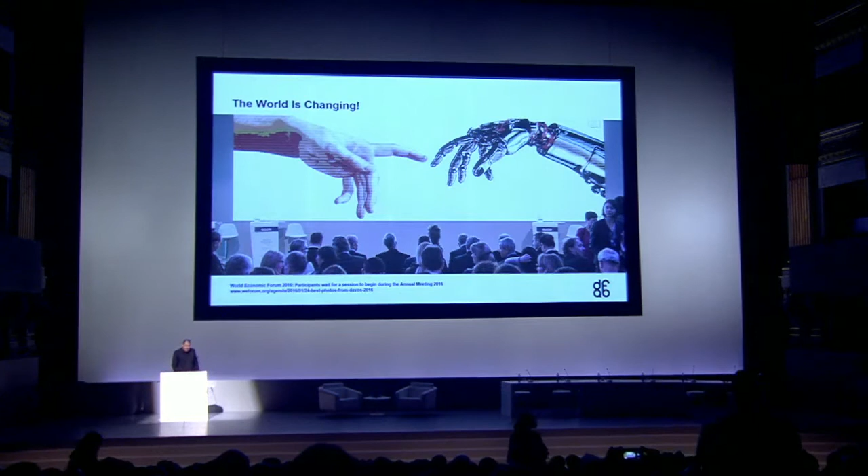I believe so. As you know, the world is changing. We are challenged with rapid societal changes induced by fast technological changes. We heard the discussion just before. Now, what is maybe a bit under the radar is also the fact that production is changing, the way we make things, the way we do things.

We heard a lot about the fourth industrial revolution, about many of those changes - 3D printing, additive manufacturing, robotics - but somehow it's always happening a bit on the side. So the question I would like to put on the table today is, will the way that we actually build also change? And the answer I would like to give is yes.

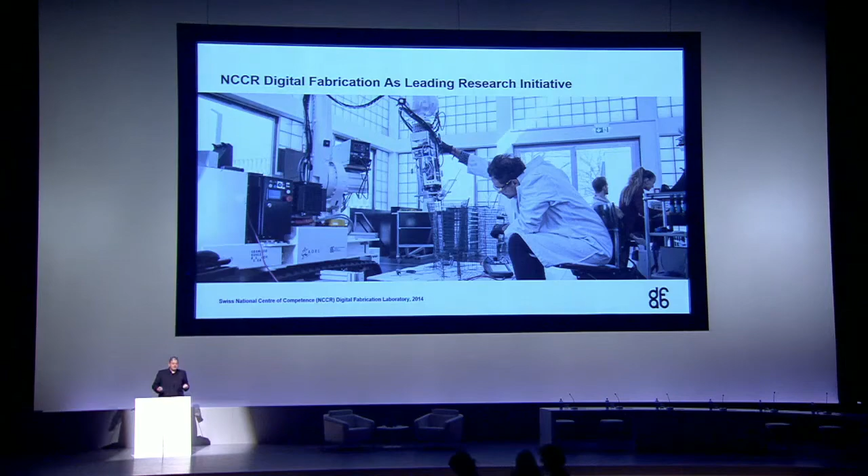In Switzerland, I have the pleasure to direct the NCCR, National Center of Competence in Research on Digital Fabrication. It's an initiative that brings together different experts from various disciplines in an interdisciplinary research setting. We have material scientists, roboticists, structural engineers, environmental people - different people working together with architects to see how we can promote and proactively cultivate a new digital building culture.

But what I'd like to do with you here is bring you back a bit in time, see where it all started, where the motivation for this development came from, so you can share this with me. We started our research at ETH Zurich in 2005, and this was the first setup which we built.

A simple robotic arm, like you find them in thousands in, for example, the car manufacturing industry. But what was special is that the robot was set up in an architecture faculty, which hadn't been done up to that moment. Why did we bring a robot to an architecture faculty in the first place?

If you want to build buildings and bring that together with the digital, you need a way to access the materiality of architecture, its materialization. How do you do that? There is no machine that builds architecture - it simply doesn't exist. There are machine-specific tools that build specialized parts, but no machine that actually assembles architecture. And if you look at architecture all around you, it's basically about assembling parts to form spaces which we all love to inhabit and take part in our social lives.

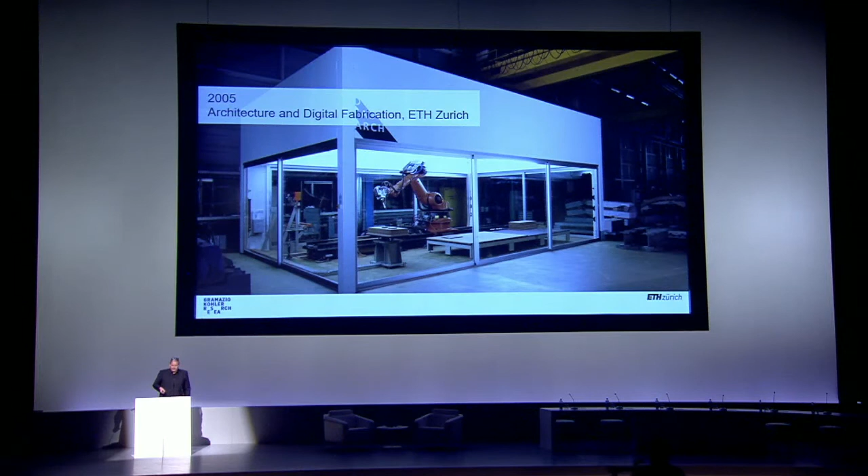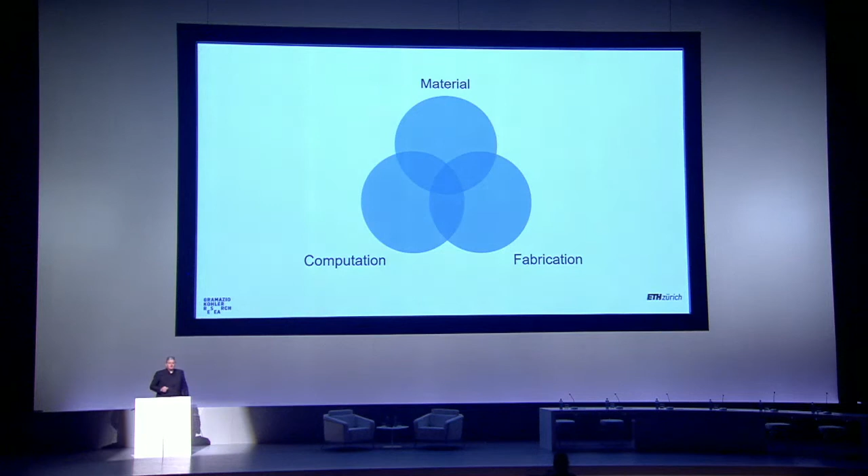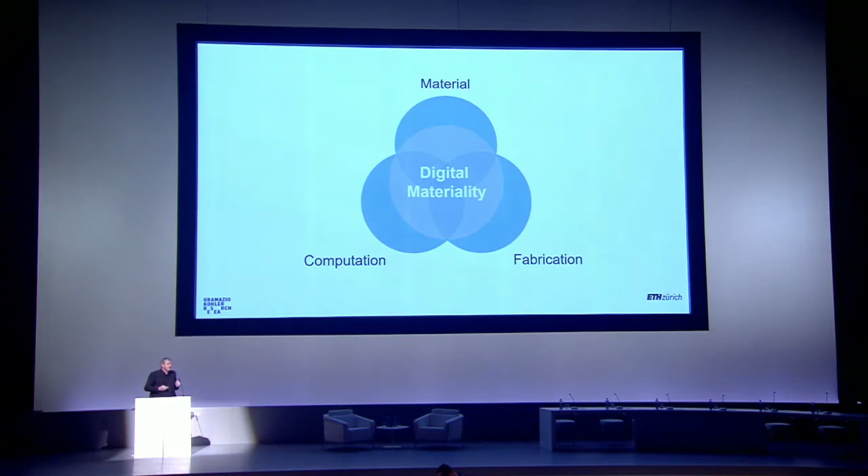From this initial setup, we formulated a hypothesis: we wanted to bring together computation, material, and fabrication. By bringing those together, our hypothesis is that materiality as we now know it - wood is wood, concrete is concrete, and you treat it in certain ways - actually shifts to what we call digital materiality, a materiality that becomes informed. In this case, this concrete wall is not an ordinary concrete wall. It's made out of concrete, yes, but it is as much digitally informed as it is physically concrete.

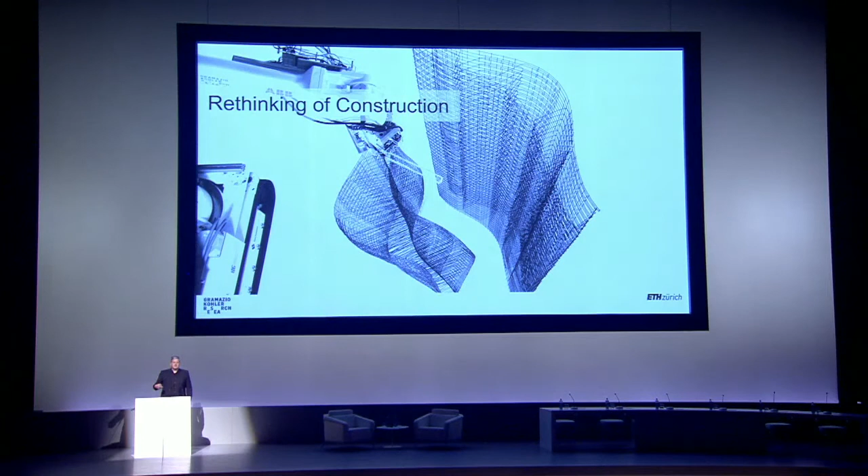Then it leads us to a rethinking on how we construct. If we start to build with these digital tools, we do not construct the same way. So education actually needs to change, and we need to think about new material and constructive systems.

This also leads us to the design of processes. As architects, we are trained to largely think in plans, sections, possibly 3D models, which are relatively static, and then through iterations come to a final design.

Now, with digital tools, we have the possibility to encode behavior as part of a design. And we can thus shift certain decisions, basically creating an openness to an adaptive design in such a way of conceiving architecture. I'll illustrate this later.

Last but not least, and that's a high motivation for me and my fellow team, the digital is also prone to lead to more abstraction in life. We always look just at screens, etc. But what is nice with this digital materiality is that the sensuality of material is enhanced. So whatever we do physically is actually exposed more through the digital control of these processes.

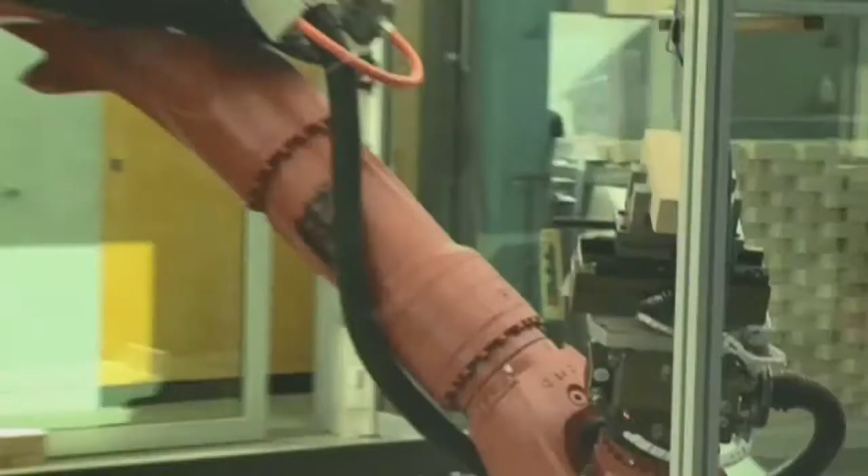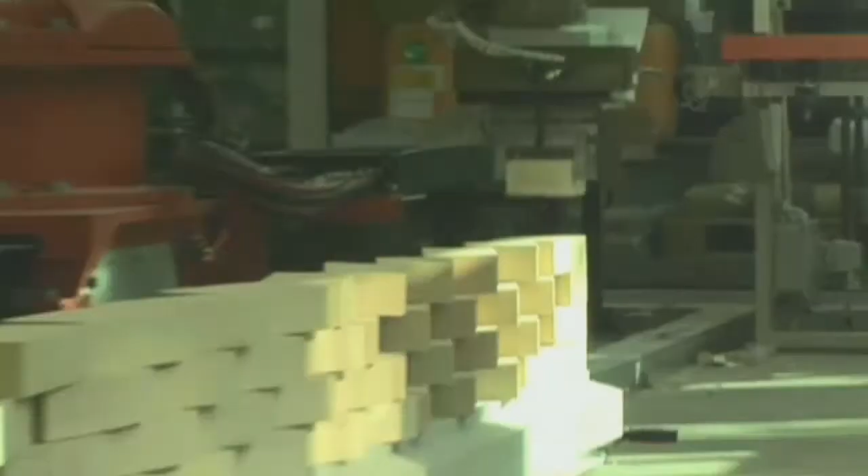You see the robot grips individual stones, puts glue precisely where this needs to be put on the stones, and positions them. What you can recognize here and in the next picture is that each of these stones is just slightly rotated, up to 17 degrees in one direction or 17 degrees in the other direction.

And what you saw before as this narrative of these oversized abstracted grapes is actually just the reflection of these slightly rotated stones in the daylight. So this facade constantly changes its appearance over the day. It has a plasticity, but if you go closer, the material which it is made out of, namely brick, is still very present. So the material doesn't lose its presence in this.

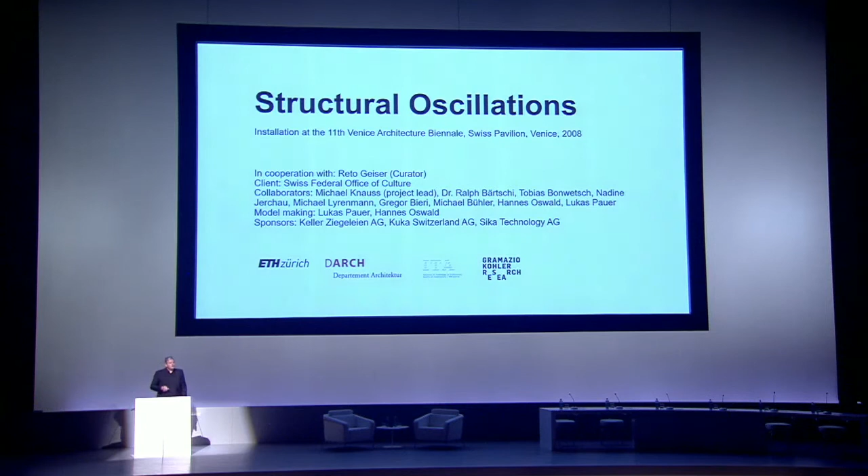Now, you could also take robots on site and start to do prefabrication on site. We tested this at the Venice Biennale in 2008. Here you see a robot called Rob in a container shipped to the Biennale, and we do the production directly in front of the Swiss Pavilion, where we designed an exhibition for.

So these walls here, you see they have certain features. They then form a new spatial arrangement in the pavilion to host an exhibition. Now, what is special here, and now I come to the design of processes, is that this wall here is transformed into this layout by a programmed design.

So this line here, we call it the line of negotiation. It's actually a drawn line. This line was drawn because there are multiple participants in the exhibition, so we needed to shift the position of this wall up to the moment before the exhibition was actually realized.

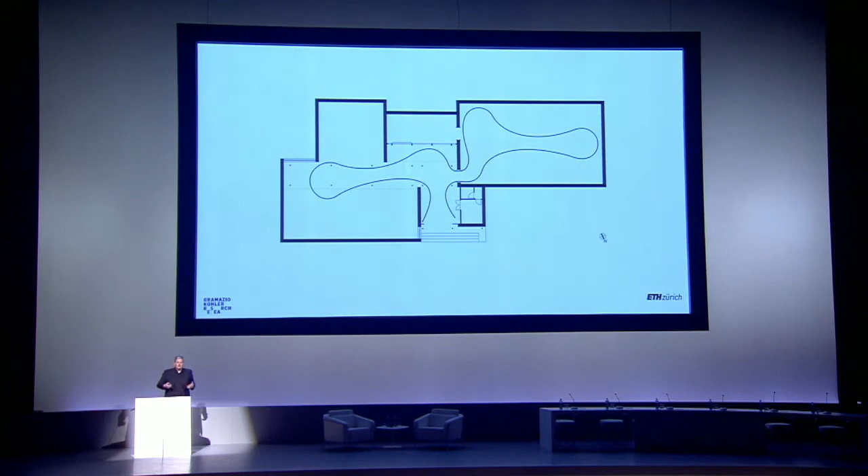Now, depending on whether this wall was rather straight or whether it was curved, the wall started to oscillate on its own, meaning by a program. So wherever here the wall, I try to show it here, is rather straight, it starts to oscillate, and where it's curved, here for example at the ends, it doesn't oscillate.

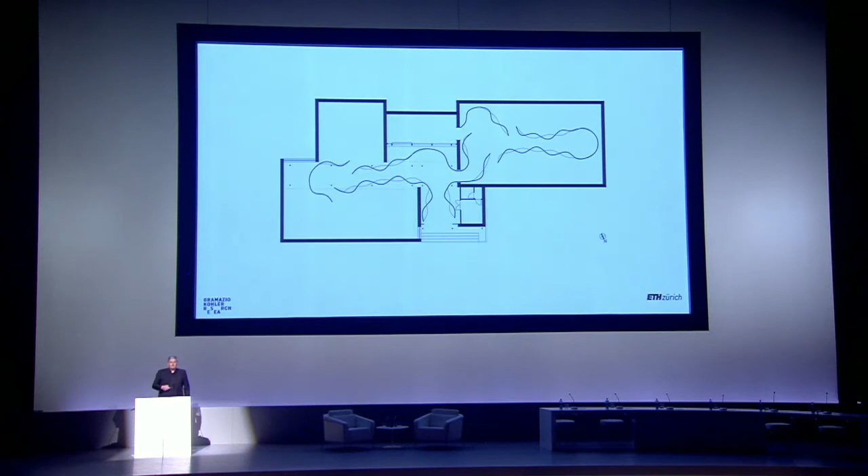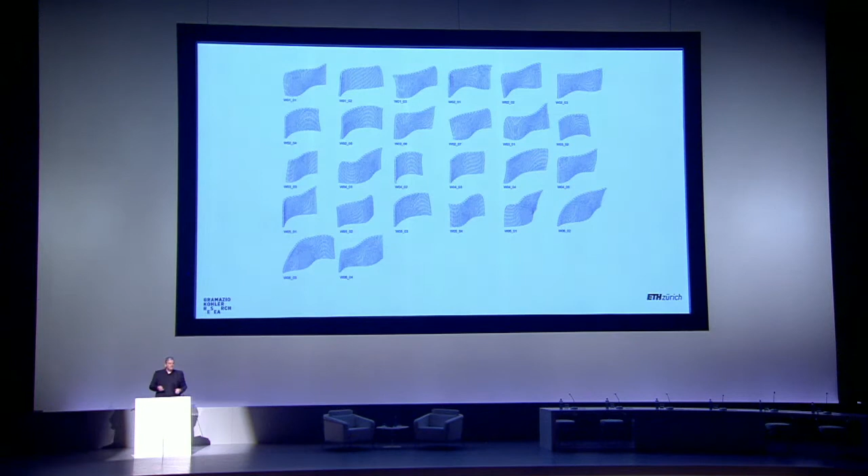Now why did we do that? This wall was produced by about 4.5 to 5 meter long segments, and by simply curving and oscillating this wall, we actually gave a constructive meaning to this wall, meaning that each of these elements could stand on its own without further reinforcement, without anchoring. So a very simple way of creating a stable wall, at the same time taking this liberty into the design of this installation.

And here you see how it looked like, how it gained a kind of, let's say, natural, almost textile appearance, and how it stood there quite gracefully without further support or anything, because we took in the constraints and processed them as part of the design. So we could change this wall layout up to the moment of its production.

So we can take robots and prefabricate on the building site, but maybe we can also take robots, and we will see that in the future, directly onto the building site. This is a program, a research which is actually still in progress. It's called Mesh Mould, and you see on the right hand what it produces.

It produces steel wire meshes, which are actually reinforcements for concrete walls. Now, what is special is that by a robot building this wall, you don't need any formwork to build a concrete wall, and you have design degrees of freedom. You can freely shape this wall, and you can also thin the wall out where you need it.

Therefore, you can save a lot of materials, a lot of labor also, in the process of making concrete walls. Now, if you know that concrete is responsible for most of the CO2 pollution in construction, this becomes quite an important argument. Maybe the way that we build with concrete will change through such processes.

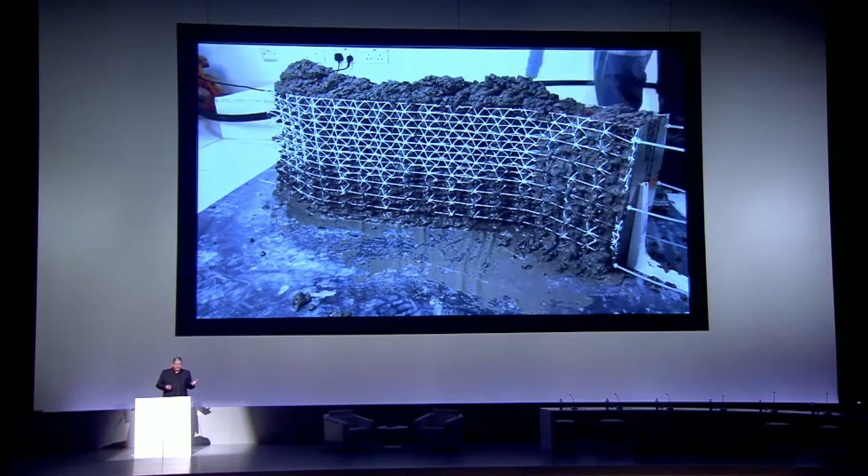Some of the material flows out, but most of the material actually stays. If you attune the properties of the concrete mixture rightly to the size of the spacing of the mesh, you directly build a concrete wall. This wall can then be finished manually, so this is a collaborative process.

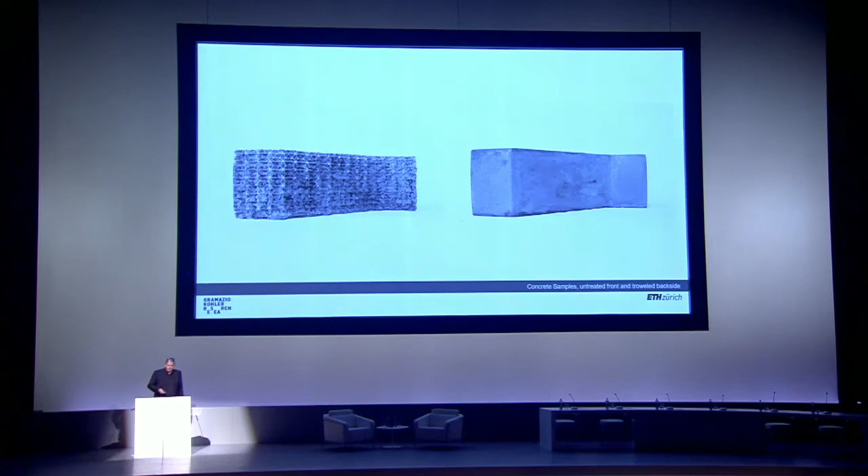At the current stage, we're now testing the system at a full building scale. This is a building that's actually the only work I showed which we did in the architecture office. That's a building which we designed in the office, onto which you can plug multiple other buildings to test new building materials, new energy efficient systems, etc.

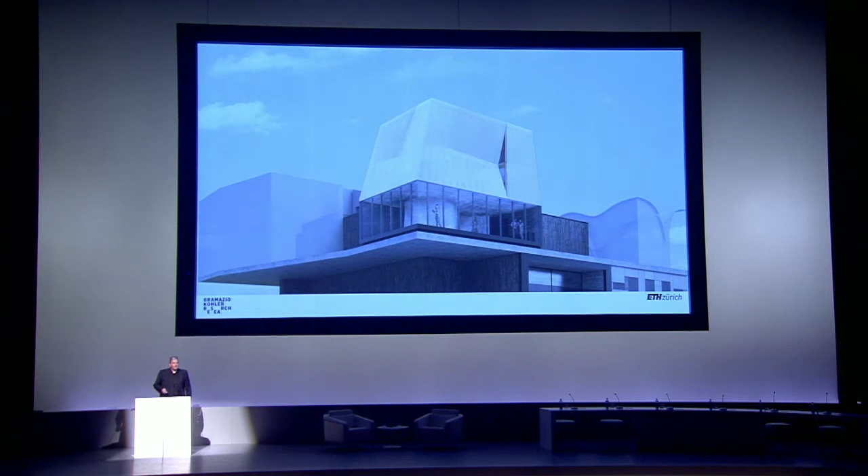On this building, we'll now build this small building, and you see in this first floor here that there will be a wall built with the system. This is roughly how the wall will look like. It's optimized for structural performance, and it supports the entire upper 2 stories. So this is the proof that these systems can actually work on a load-bearing scale.

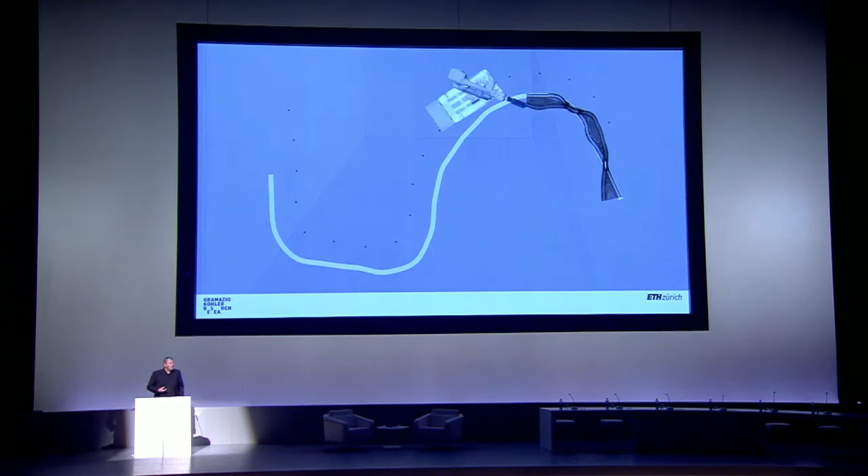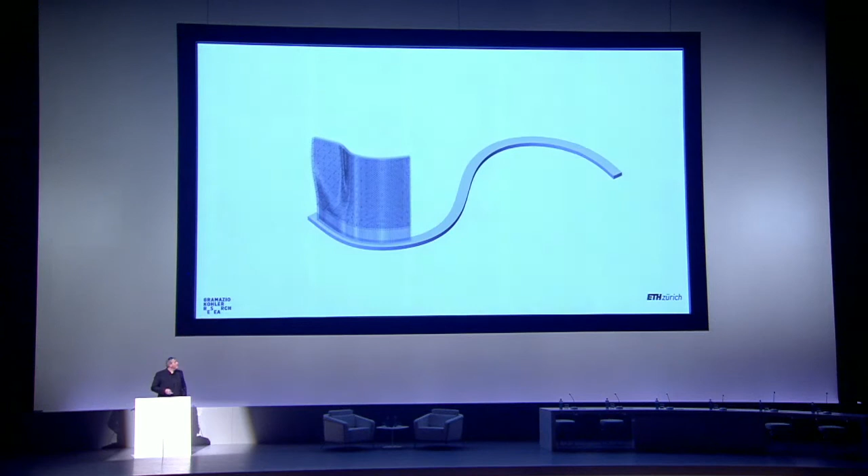Here the robot will be repositioned at different instances and build this continuous mesh. The construction of this has actually just started last week. So here you see how that looks like.

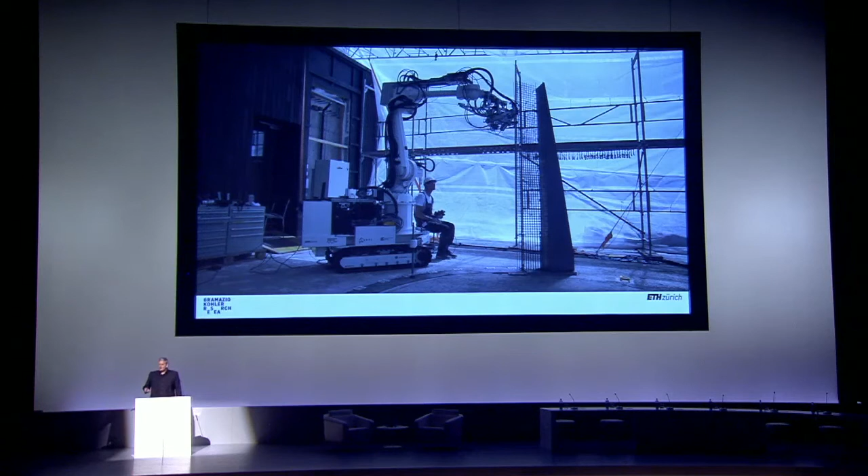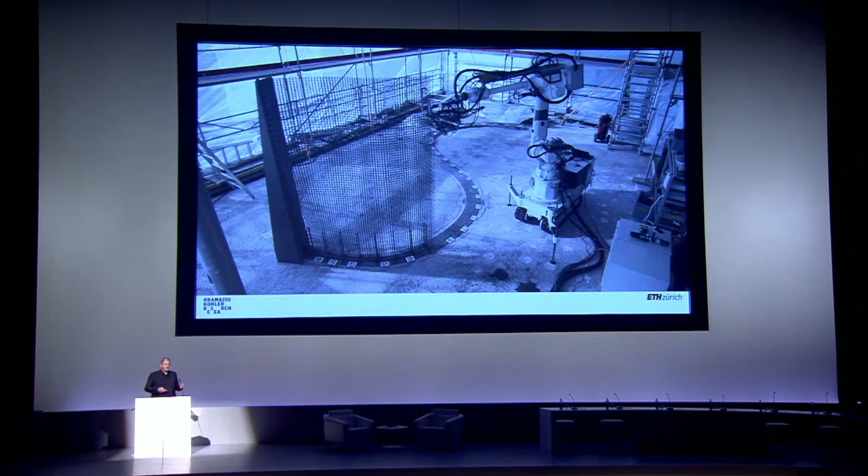Now we can debate, what is the human now doing here? What is his role? Watching robots? How many humans versus how many robots? But still, it is interesting. This research is now about a decade old, and we already transgressed, with the help also of roboticist colleagues and material scientist colleagues, to a state where we can demonstrate it on a building site.

So if the future is now, yes, it is now. It's really happening as we speak. Maybe in the future we will see these kinds of peers of humans which are robotic, and this larger question on who controls whom is obviously out to be discussed, and also the question of labor shortage, etc.

But I want to point your attention more on the possibilities that this brings. In this case, as I've shown earlier, you can really efficiently produce these walls. You don't have to follow the straight walls that stem from the old industrial age of producing straight formwork in a repeated manner. Here, form doesn't cost anything.

That's a completely new paradigm. How do we deal with this design-wise, but also integrating other disciplines like structural engineering, etc.? And how can we use that in a material efficient way, but hopefully also create really livable spaces with these new technologies. Now, I've shown how robots can go from the factory up to the site, but maybe robots in the future will look different.

Here is an experiment which we did also with a roboticist colleague from ETH Zurich, and we built an installation by a flying machine. Here, these machines cooperatively build up a 6-meter high tower, and this tower, this installation object, is only built by this machine.

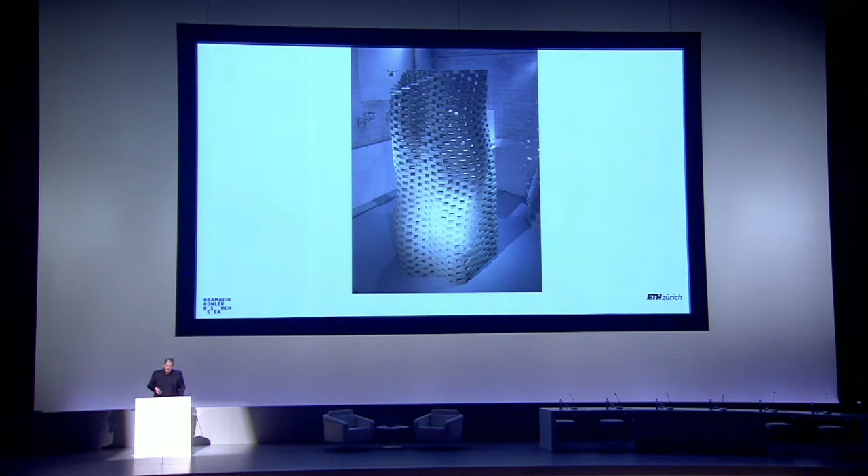Now, in this case, I make a small loop to kind of an urbanist debate. We also did a speculative project on the occasion of this exhibition project. We actually said, well, one of these blocks is not just a block of foam, which is flown there by these quadcopters, but it is actually a 3-story unit, which can be outbuilt for plenty of different purposes, from a cinema, shopping mall, down to different habitation configurations, hospitals, etc., civic services.

And we kind of conceived this object as a provocation to say, could the city be an object? We placed this object in a region in France that is called Meuse. It's in the so-called Diagonale du Vide, the region in France which has the least population density.

As an interesting matter of fact, exactly in this area, there is a TGV station which had been put there for political reasons. So this area in the middle of nowhere is connected by train in less than an hour to Paris. So here the idea is, could we not build a city for 30,000 inhabitants there as an object? We use it.

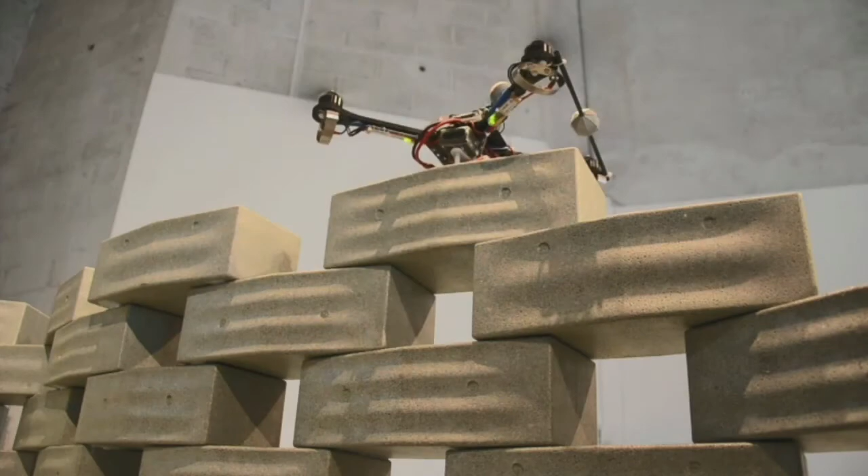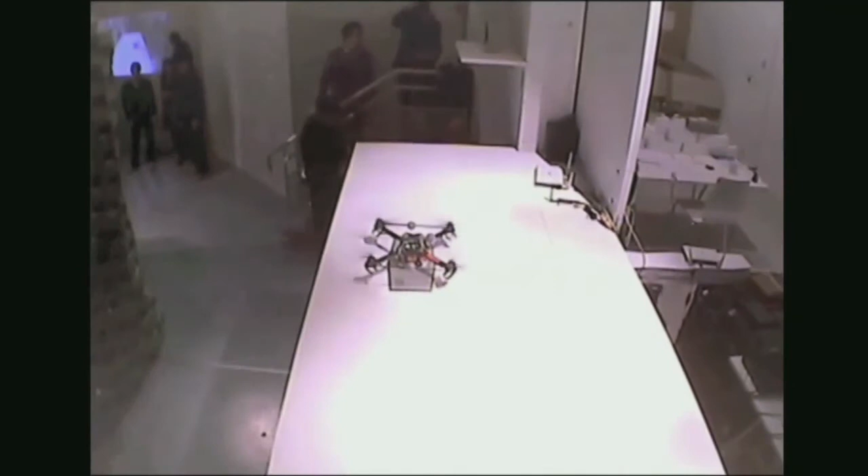Please note that this drop that you've been seeing is the most precise way to position an element, because you don't create turbulences that you would create when you approach slowly.

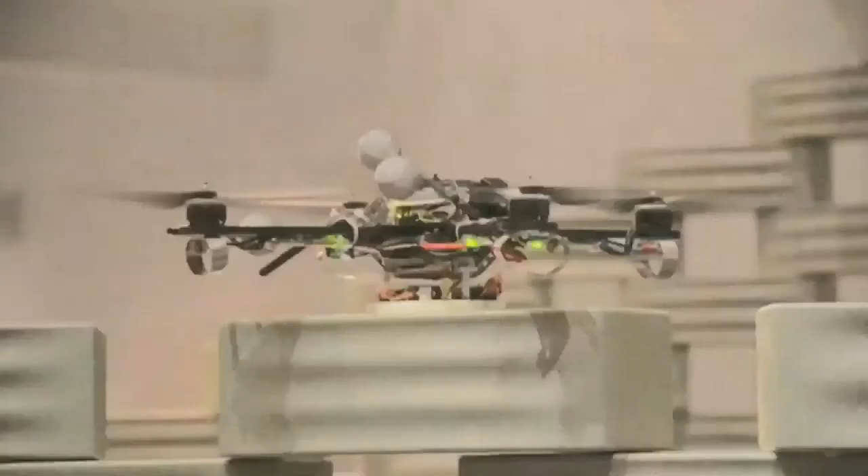Here you can see how this tower builds up almost magically, without almost visible interaction, really by the material just being deposited by this swarm of machines.

So not only collaboration of humans and machines is a big topic, but also the collaboration and cooperation between machines. Are they specialized in different trades? Do they cooperate? How do they do that? How do they then interact with humans? So there's an entire new ecology, if I may say so, with these digital tools to be expected.

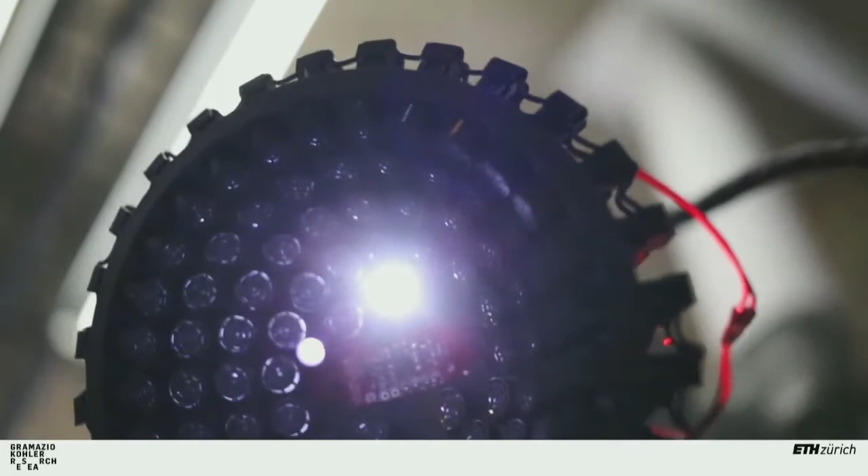Now, a very small and moderate project, but just to open up the spectrum of thought, is a recent installation which we did. Here a robot does nothing else than manipulating one particle by suspending it in space. So you see this white point, and this white point is actually held in place by ultrasound waves which you cannot hear. Then you take it out, if you wish.

So with this I would like to show that the relation also between machines and material is starting to change. We have an entire chain of changes and possible mutual interactions, which I think is a fantastic field to explore. Beyond just problem solving, it could create new realities which are also a delightful part of human life.

Good, so now to what degree is this realistic? Can this be used? Will we see this soon in construction? The biggest project which we realized so far is a roof structure.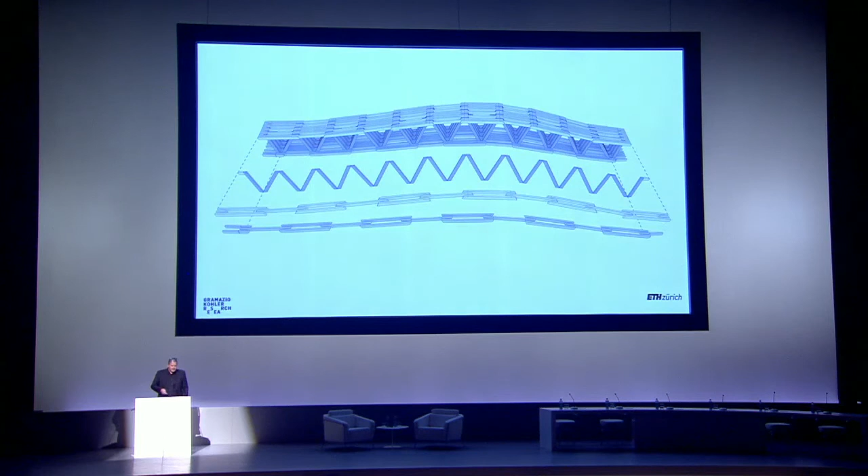Here you see how it's built. It's made out of very simple, standard, ordinary timber slats. These slats are nailed together, in this case, to form these 15-meter long beams, which are then assembled. You see how these beams are built up. It's a relatively simple build-up.

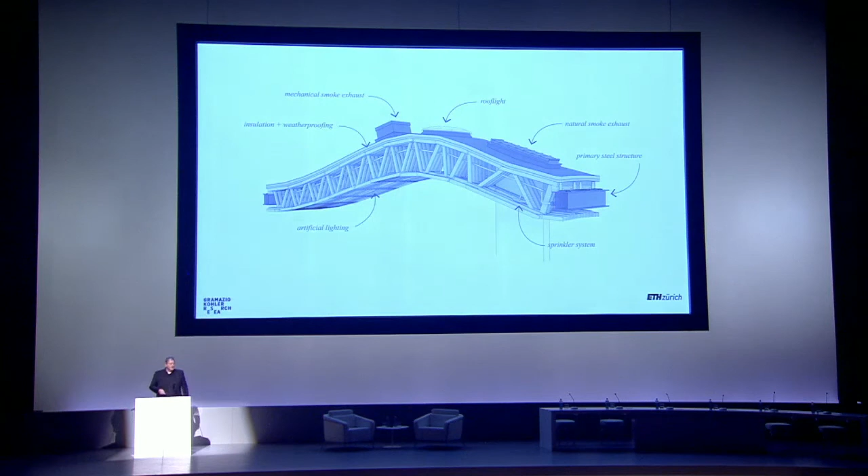Now, what I've shown before in the plan, you see how the digital, in this case, not only provides the form and the assembly information of these beams, but also provides a system which can integrate all the necessities within the form of these beams. And so then the digital model is only a representation of the design, which is actually, by a large part, programmed.

So what does it mean if architects in the future program? It's a difficult question, because it's not so easy to program, it's not so easily accessible, it's maybe not so visual.

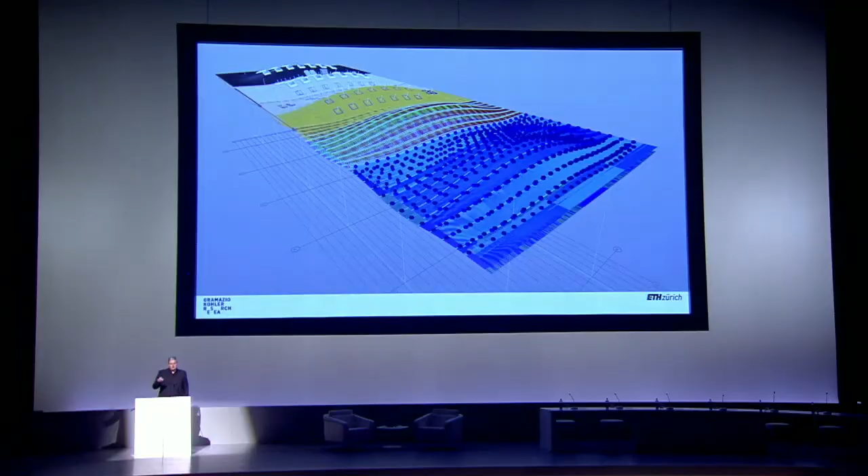Yet at the same time, for all those that have done some programming within a design context, it can also be very enlightening to actually have the feedback, always the visual feedback of the rules that you give the computer. But that's going to be a larger cultural question in architectural education, if programming can be part of it.

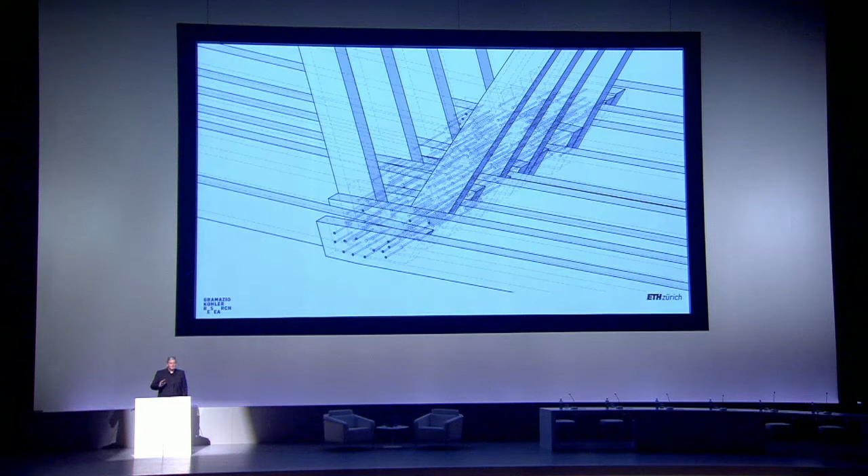Then, of course, computation solves a lot of nitty-gritty details. This, for example, would be a nightmare for every human to calculate or execute, because here every nail must ensure that it doesn't hit another nail, and there need to be a sufficient number of nails in every node to fulfill the static requirements, which are calculated on each of those nodes.

So we start to enter an area where even engineers cannot control every instance of such a building. They can only do it with digital tools, and therefore they need to design the algorithms. Then, how was this roof built?

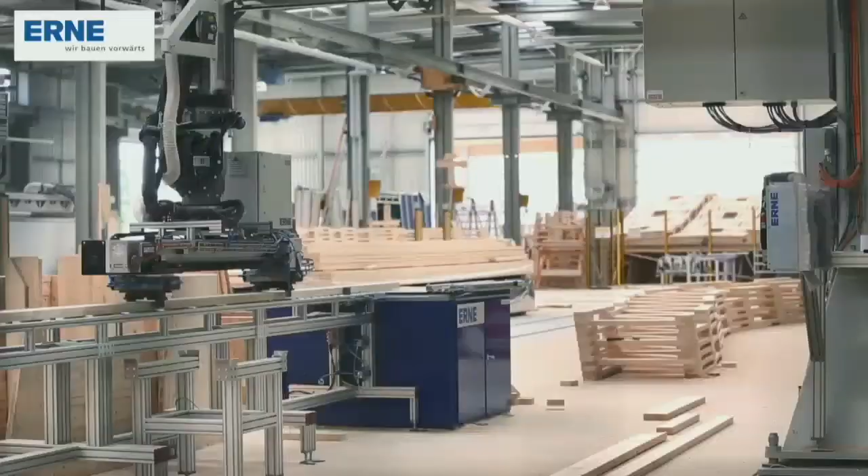Here, sorry, it's a bit of a promo video by a contractor, but here a contractor got excited about the project, and he actually invested in a robotic facility, building it specifically for this project. Here you see the robot cutting the slats, nailing the slat, with this nailing pattern which I've been presenting you before.

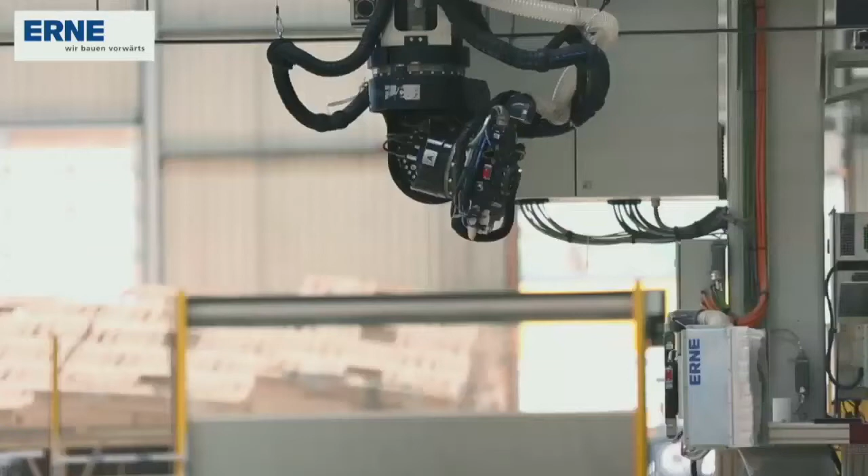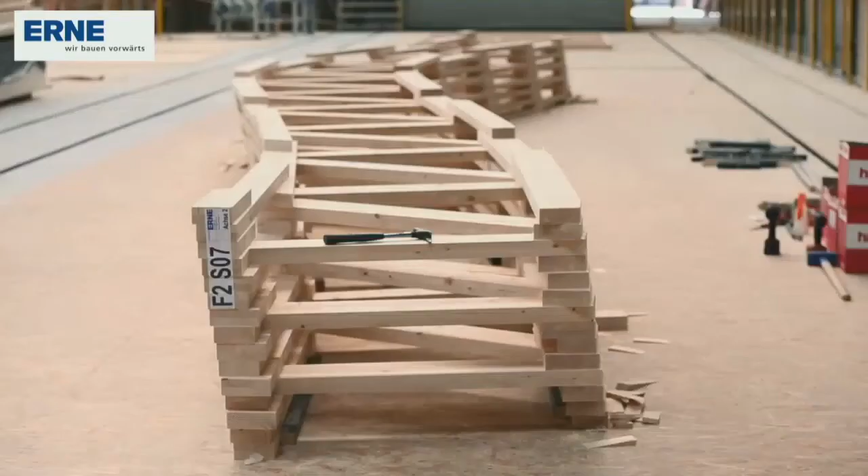And what you end up with is really a kind of 3D printed truss at 1-to-1 scale, only that here it's not powder binded together by glue, but really slats with nails that are put together at the full building scale with real building materials.

And of course, the materiality of the timber is important for the quality of the space in which we all live and now actually collaborate really well.

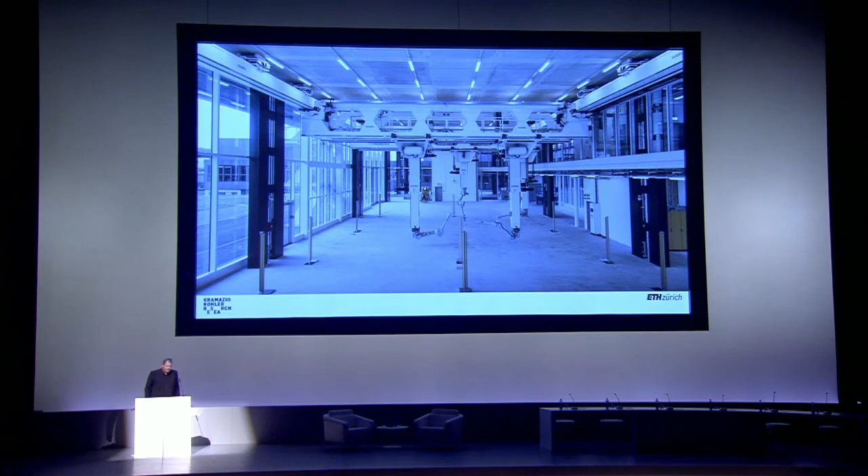And we're doing this with structures like this, where we test how two robots can cooperate to build up such a structure without further scaffolding. Now, to end up, I would like to show you one more project, and I'm a bit over time, so I'm going to go fast.

The quest of Rock Print, a project which we've done together with the Self-Assembly Lab of MIT, was how could we build in a very sustainable way with very ordinary matter? In this case, gravel, a material which you find everywhere.

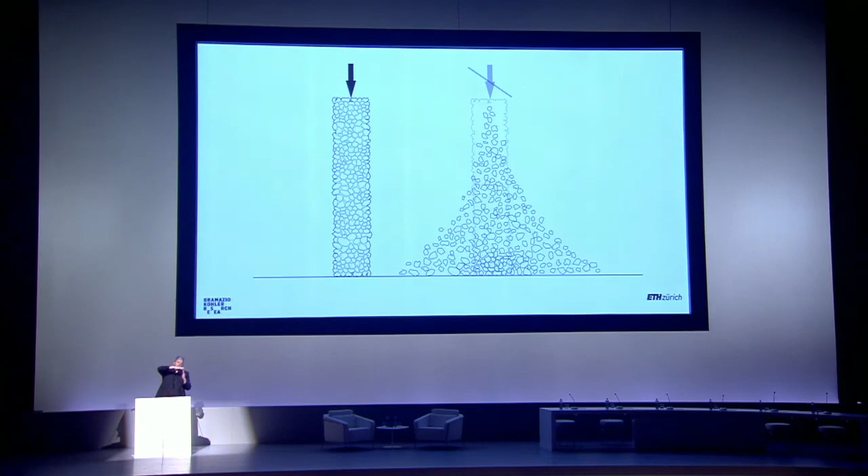And knowing that the main loads of buildings are actually in the floor slabs, could we use an effect called jamming, where if you put a lot of weight on gravel, the gravel for a moment is stable, doesn't move anymore, cannot go away. And when you lift off the floor slab, it actually goes back to its original state and becomes gravel again. So we have fully renewable resources.

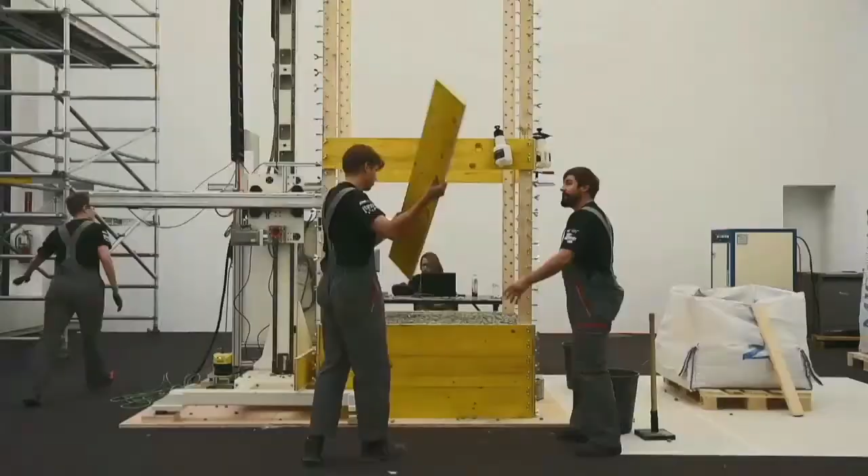Now there is a trick to it. If you do it only with gravel, it doesn't work. But if you combine it with string, it actually does, if you do it in the right way. So what we've done here is build up layers of gravel followed by layers of string subsequently, in a container of 4-meter height.

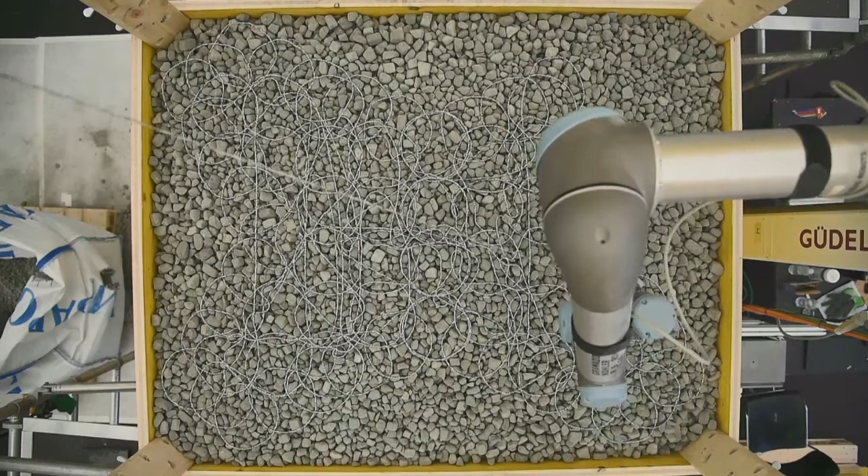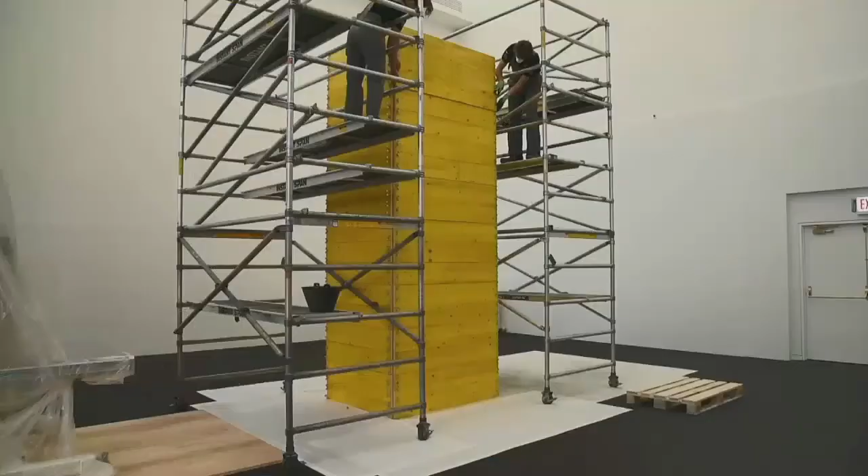So this entire volume weighs around 2 tons. Now you can take off the perimeter of this box. And the only reason why this is sticking is because it's lightweight gravel, because the floor of the Chicago Architecture Biennale couldn't support full gravel.

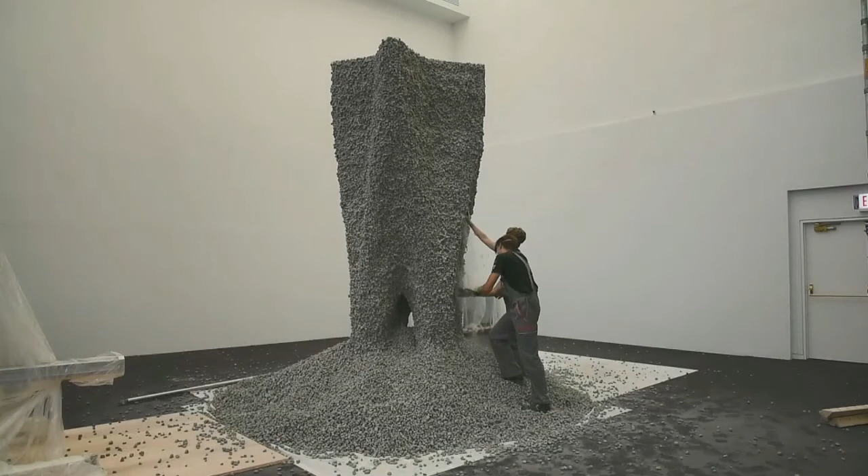And then you can unearth the structure that you've built inside by the network of the strings. And this is how it looked like. So the mass on top is actually stabilizing the rather slim legs below.

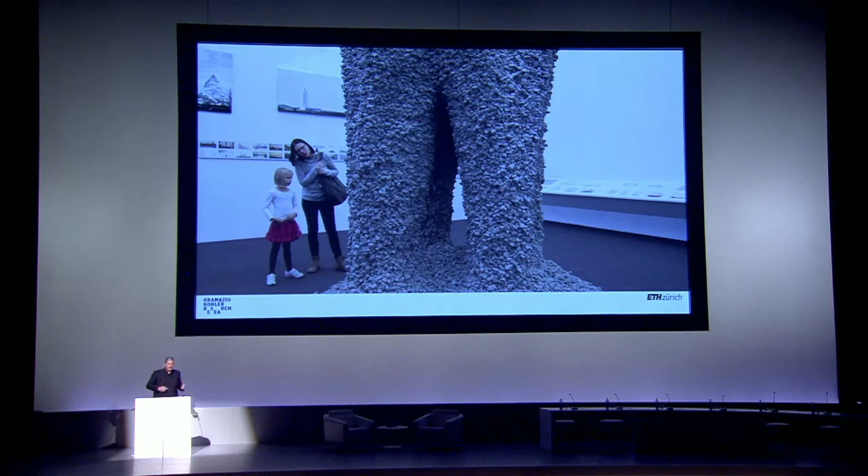So there is no steel in there, there is no glue reinforcement whatsoever. You see the kind of new materiality that emerges, so sheer gravel, as a building material. So I think the low and the high tech are not mutually exclusive. I think they can come together in very nice ways.

And the proof of concept that this is fully reversible, we did at the finissage. So here you see Petrus, the project leader, actually pulling out the string.

This is the aesthetics of it. So everyone who likes performance art is also liking these new technologies.

Good, and with this I would like to end. So basically we're back to the raw materials where we started with, and I think we're at a very exciting moment in time. Probably we go towards a new digital building culture, can be on the very small scale, could also be on the very large scale of new cities. Thank you very much for your attention.